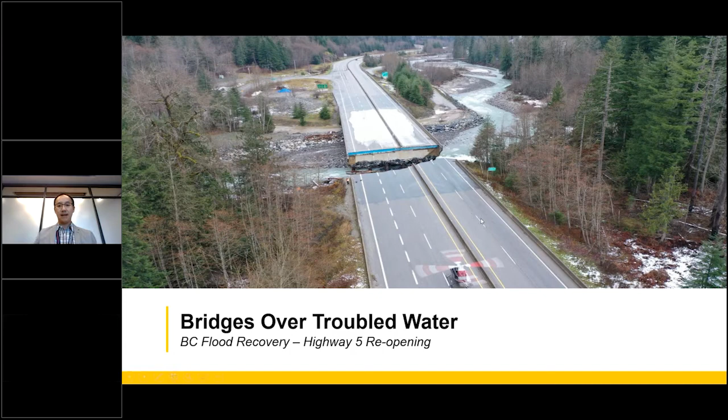So just a little bit of a quick introduction, so kind of who we are. We're one of North America's largest engineering and construction organizations. Our home base was started in 1884 in Omaha, Nebraska. Here is just a little bit of a quick overview in terms of the markets that we serve.

But more importantly, a lot of the question may be, how did we do it so quickly last year? So we are a little bit more than just a construction company. My group, the group that I belong to, is called KIE, internally known as Kiewit Infrastructure Engineering. Consider that as almost like an internal consulting firm within Kiewit itself.

We have our main offices in Denver, Laval, Burnaby, and now in Mexico. A lot of the engineering services that we offer from this office and from our other offices include structural, geotechnical, and civil, and on the civil side, it covers transportation, utility, drainage, and hydrotechnical. So it is with this type of caliber, this horsepower, that we were able to get the work done last year.

We actually had people flying in from Laval, from Denver. Everyone contributed. This goes beyond just the road builders and the engineering community in BC. We were able to get a lot of help. So hopefully today we'll be able to go through a little bit of a quick story about just how we got Highway 5 open.

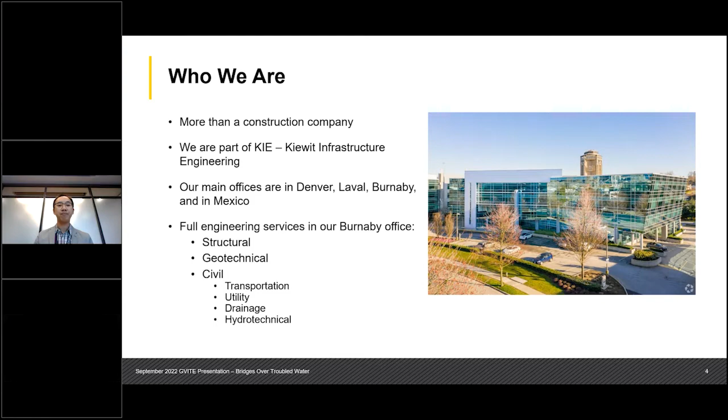So preface, a little bit of storytelling.

How we were out there is basically Kiewit is working on the Trans Mountain Spread 5B project. We are teamed up with a couple of other firms, so we call ourselves Team 5B. We were just working out there, like many of you on this call who are probably working on the Trans Mountain project as well.

Our spread runs from Coquihalla to the Hope region, and Coquihalla is just right about the Zopkios rest area, all the way south to close to Popkum in Chilliwack. Basically, we're working along, producing our traffic control plan drawings, similar to something you see here, our typical access point on Highway 5. That was our main job out there on Highway 5, before November 13th and 14th.

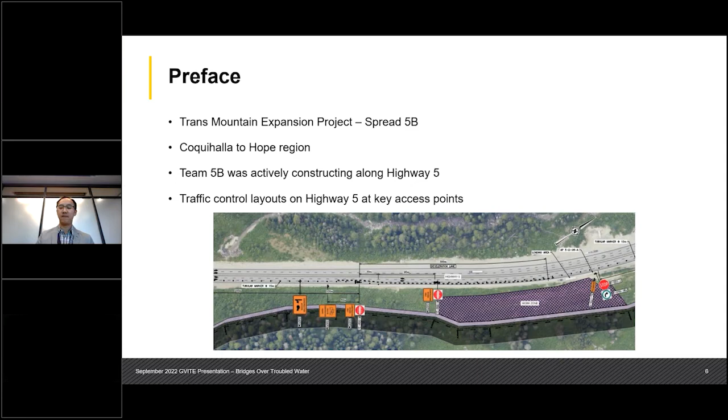And then that weekend, November 13th, everything changed. On November 12th, after we'd already had a pretty rough year from a weather event perspective, we had probably one of the hottest summers we've ever experienced with the heat dome. We had a lot of wildfires, and when fall came, it was a pretty wet one.

So we were pretty used to it, and then we started hearing about all these new terms, atmospheric river. No one really knew what it was. As far as I know, I only knew of the Pineapple Express. So, let's see what this brings us.

With the weather forecast, we thought, we're pretty used to the rain in Vancouver, so it could be just another typical day.

And then the next day, over the weekend, we started waking up to hearing all this news about the massive flooding we had, throughout pretty much all of the south coast of BC. Abbotsford, as you can see on the right side of the screen, completely underwater. Highway 1 was basically inoperable. You hear a lot about the mudslides around Highway 7 in Agassiz, and of course, our project, Highway 5.

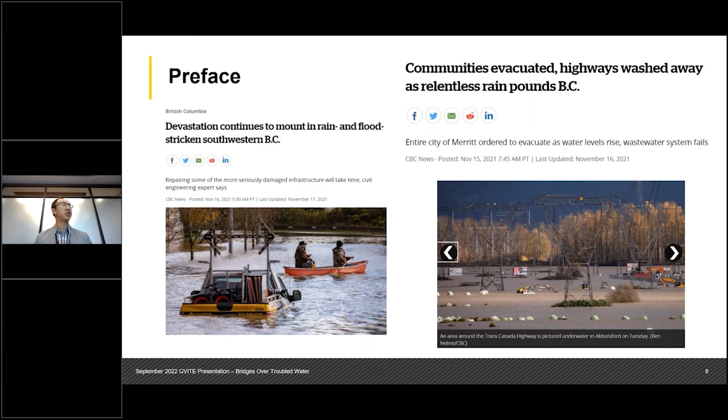I think most of you have probably seen these photos that were covered quite extensively by the media. Immediately on Twitter, the morning we woke up, we saw that this location, I believe this is at Carolin Mine, was completely gone. So Highway 5 is no more. It's no longer really accessible.

And then, as you can see in the title, not just Highway 5, we also got the Malahat Highway on Vancouver Island impacted.

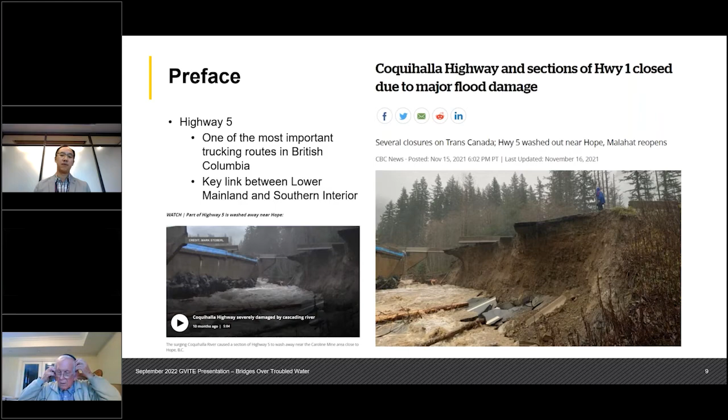Highway 5 probably needs no further introduction. It's one of the most important truck routes in BC, linking Kamloops and the Lower Mainland. The amount of truck traffic on there, for all of you who have driven on it, is pretty insane. In the summertime, you also get RVs and things like that. But in a year already devastated by supply chain issues with COVID-19, losing the linkage of Highway 5 was a big blow for our province.

And I don't know how... okay, give me one second, small technical difficulty. Not sure how it got all the way to the end. Okay, almost there. Okay, very sorry about that.

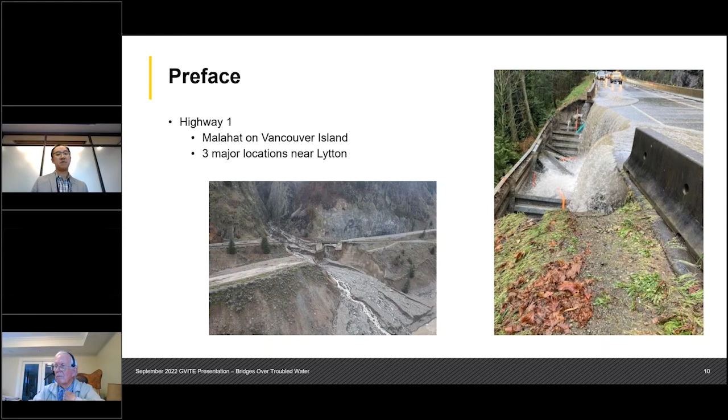So as mentioned, Highway 1, a couple of shots in terms of the damage we saw on the news channel. We got Tank Hill on the left side, where you can see the road was just completely gone. On the right side of the screen, that's Malahat. Highway 7 near Agassiz, massive washout over there as well.

So what that led us to was basically our land access between BC's South Coast and the rest of Canada was literally completely cut off. What you also saw, Highway 99 was also damaged.

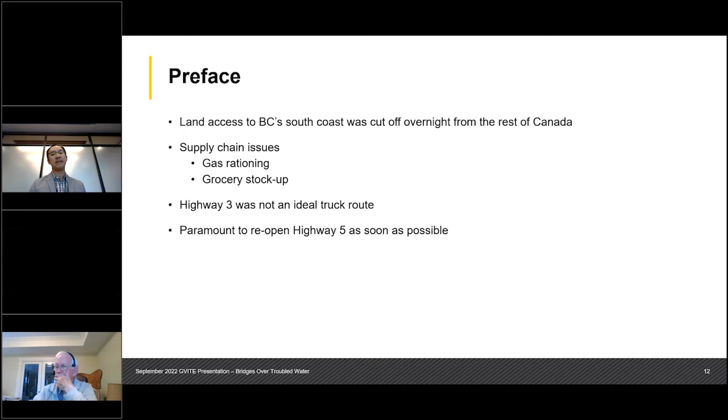It led to, hopefully, something that will only happen once in a lifetime, gas rationing. And we noticed a lot of people stocking up at the grocery store, worried about not having enough food and regular day-to-day supplies at home, just due to the fact that we'd no longer be able to get goods from the interior and other parts of Canada.

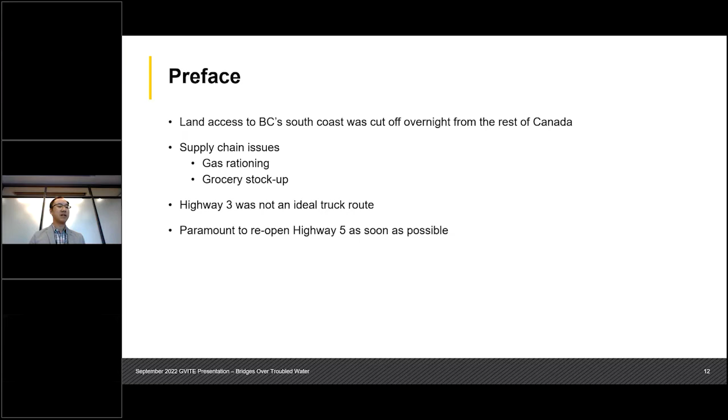As most of us have observed, Highway 3 is definitely not the ideal truck route. Trucks can travel on it, but it's definitely not able to take the level of volume that Highway 5 used to carry. So therefore, it is paramount that we work together as a community to try to open up Highway 5 as soon as possible.

So this is kind of where the story starts. I call it the Highway 5 story. The first thing we have to do is go out and take a look in terms of what the damages are. What we see on the TV screen is just a small snippet. You almost need to go out there and see it for yourself to have a good appreciation of what Mother Nature brought to us. So we were, a couple of slides, I call it the force of nature.

So November 13th, if most of you recall, it wasn't just one event. We were out there immediately afterwards, starting to help with early repair work, putting out riprap and things like that. But a lot of our effort was basically lost when the second atmospheric river came on November 20th, if I got the dates correct. We were out there again trying to fix things. And one more time, the third time, November 29th, and that was probably the most devastating blow to Highway 5.

Luckily, after that, things started to clear up a little bit, and that's when we could really get to work.

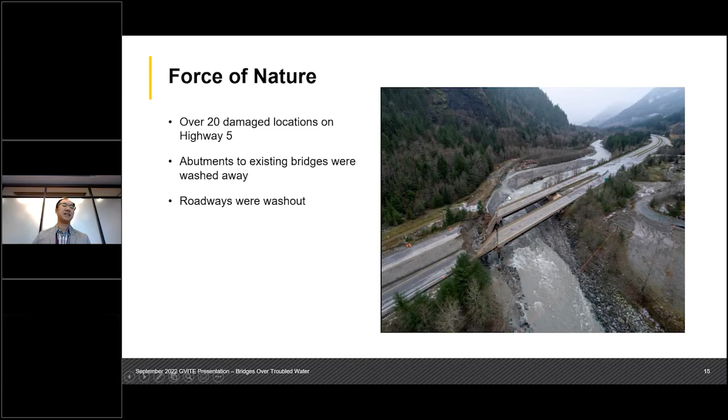A quick assessment on Highway 5 found over 20 damaged locations along the route. It ranges from abutments being washed away to roadway being washed out. What you see here, I believe that's Jessica Bridge. The water starts carving itself into many ways, and our abutment was completely washed away on this side, so the water ended up where it's not really supposed to be.

So starting from south to north: Jessica Bridge, and then next up we have Carolin Mine Bridge. Ottomite was assessed, but later it was deemed not to be an extensive project, so just patch repairs, if I recall correctly.

And then further up north is still kind of what you see today, the bridges just standing out there on their own with no linkage: Juliet and Bottletop. So here's a quick overview of what the damages were at these locations.

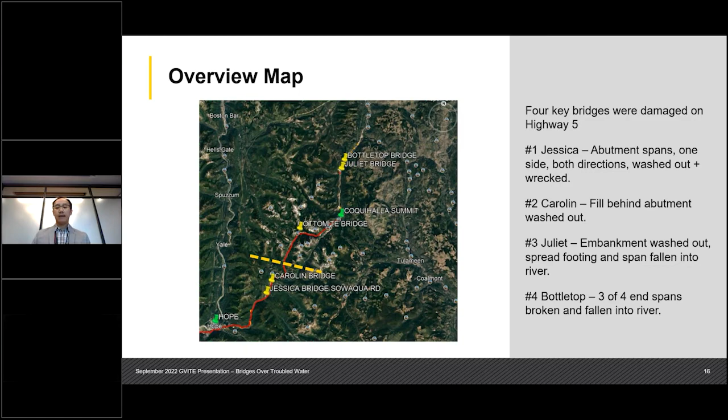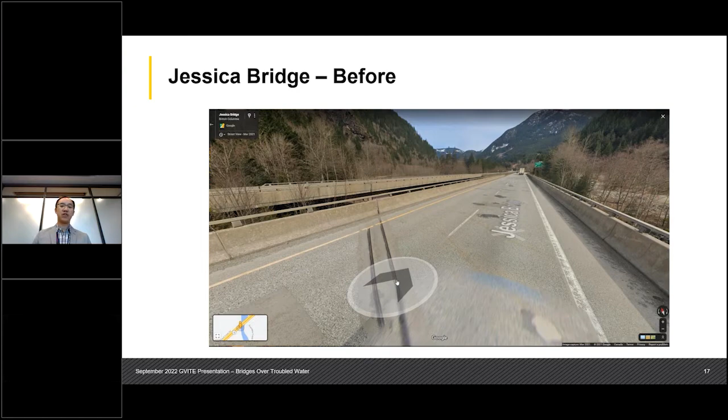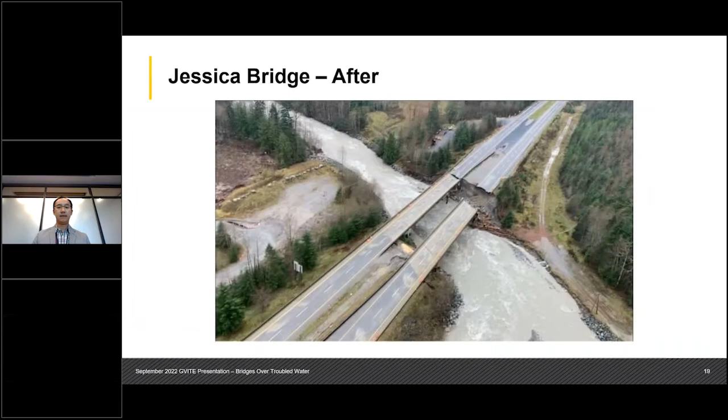This presentation focused on basically 3 bridges that we worked extensively on last year. Jessica Bridge, here's a shot of it before, and that's what it looks like immediately after. I think this one was taken after the first event. Here's an aerial shot of it.

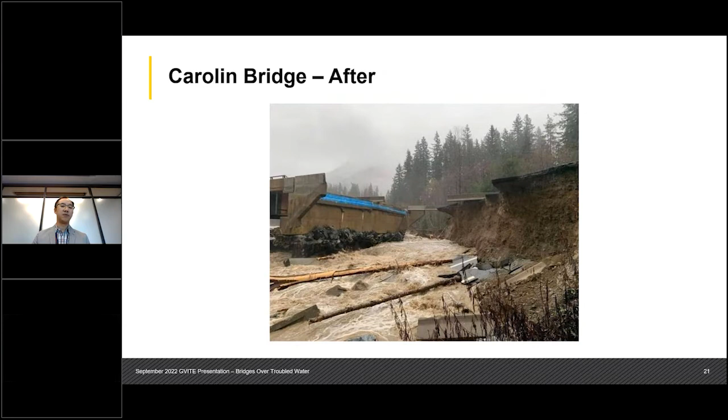Next up, we have Carolin Bridge. This is a shot before, and the shot after, basically what was covered by the news media.

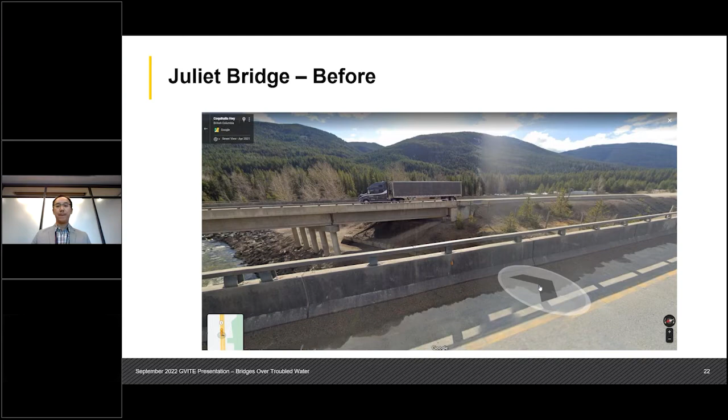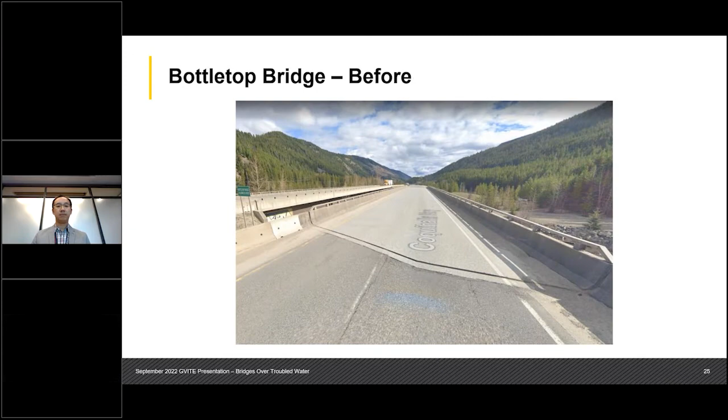Last but not least, we also have Bottletop. And Bottletop, as you can see, is just devastating in terms of what the force of nature has done. This riverway wasn't really supposed to be there. It's able to carve out the entire chunk of the highway. Basically, this is something we realized - a lot of the river training over time probably just wasn't able to withstand the amount of rainstorm that we encountered last year.

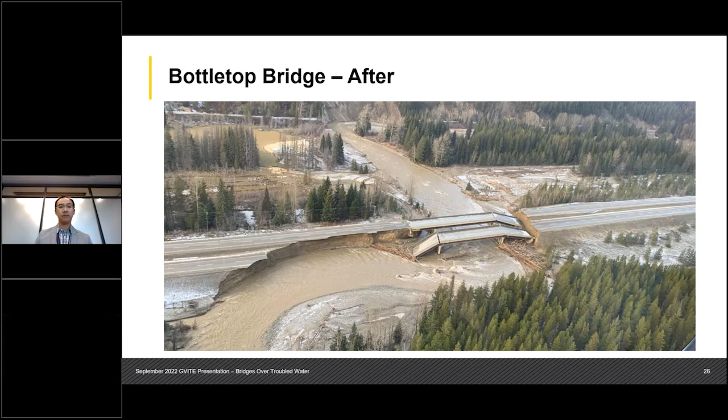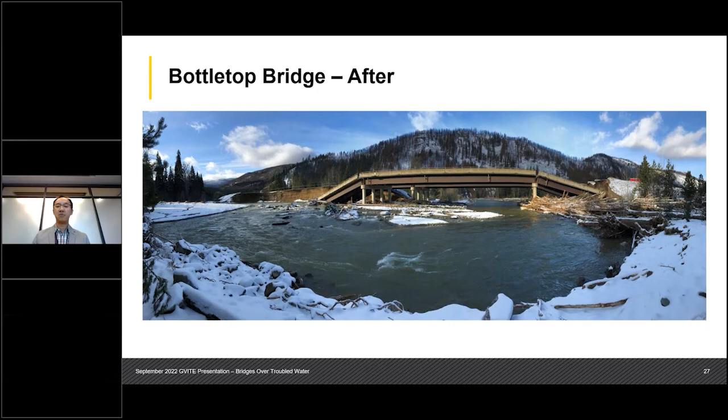As you will notice in quite a lot of the photos coming up, this also happened in the midst of winter up in this area. So a lot of the challenges we face include the climate we have to work in as well. Here's one of the shots taken a little bit after, immediately after the rain event. A few days later, we got a big dump of snow up there.

To do the damage assessment, we have to do a very good job of data gathering. With Highway 5 being inoperable, we have to come up with different ways to do it. One of the most effective ways to conduct data gathering is having in-person visits using helicopter. It allows us to see the damages of Highway 5 from the air, but at the same time it's also able to land our field team in places that vehicles cannot get us to.

Another item that we used quite extensively last year to help assess the damages, and I believe the ministry and a lot of the other firms involved with the flood recovery also used drones. It's been a pretty cool piece of equipment for recreational users, but for construction, it's actually very important these days. It lets you do a site visit while staying on safe ground, so you can go up, and at the same time go down underneath bridges to assess the embankment and the integrity of things like that. So the usage of drones was actually quite instrumental on this project.

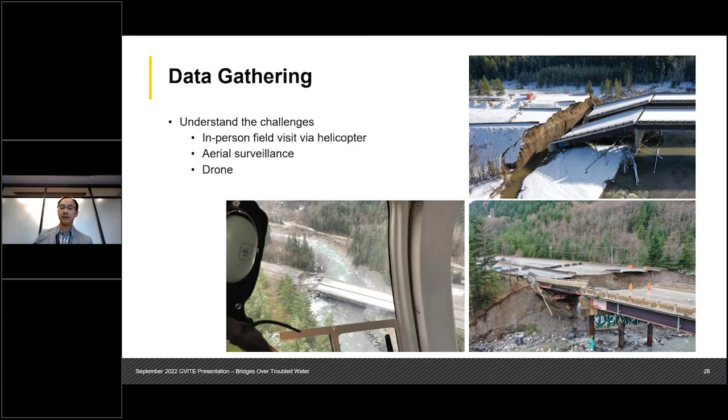This happened to be a pretty common sight. I think this was December 6th, if I'm not mistaken. So after the third atmospheric river event, we were able to get some calm skies, as you can see here, so we could do a more comprehensive site visit and assess the damage in a bit more detail. A lot of the repair work was already underway by this point, but we needed to figure out exactly what we were going to do to try to open up the highway.

So when the land highway is closed, basically what you end up with, this is just at the top around Bottletop, you basically have a highway in the air. It basically became an impromptu helicopter landing pad, and the amount of helicopters going in and out of there was tremendous. This was also my first time getting a ride on a chopper, so we got to ride on a pretty cool red one with a bit of a bubble screen.

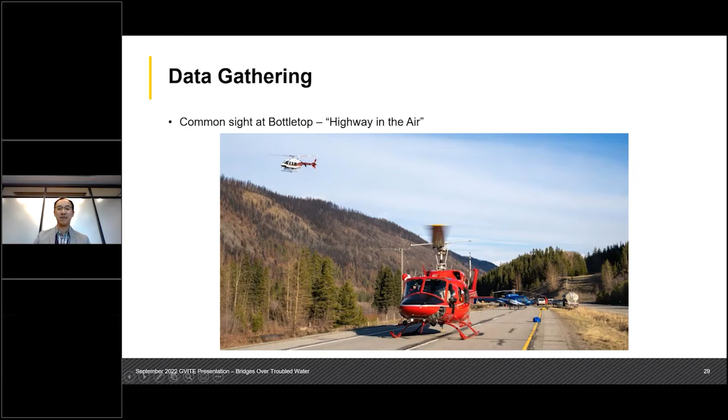So after assessing all the damages, it's time to get to work.

The importance of Kiewit on this project was that we just happened to be at the right place at the right time. The amount of equipment and manpower required to start the repair work requires a lot of resources, and we happened to be right next to the project, building our Spread 5B, which was put on hold by that point. So we were immediately tapped on the shoulder by a lot of our partners in the area, asking if we were ready to help out. Of course we were. We rolled up our sleeves, moved our equipment, and were able to mobilize very quickly.

So the two groups we worked mainly with out there were Emil Anderson, who is the highway maintenance contractor south of Portia, and also YRB, who look after Highway 5 north of Portia. These are the two groups we worked very closely with, and essentially that's how the project broke up. So Jessica and Carolin Mines were within the Emil Anderson side, and Juliet and Bottletop were with the YRB side.

The first thing we had to do was remove a lot of the damaged bridge sections out there. As we were doing that, we were able to look at the damages a little more closely, ensuring that the substructure wasn't damaged. Most of the impacts we noticed were really just on the abutment side, luckily. The piers for the bridges tended to be in decent shape. So we were able to start looking at what some of the more effective and efficient solutions were to start restoring highway traffic.

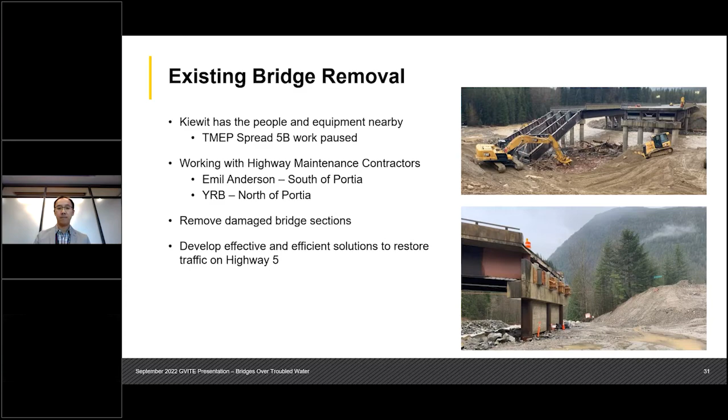While we were taking down all the damaged infrastructure, it was equally important to protect the existing infrastructure as well, to make sure we didn't lose any more bridges. This was essentially what we talked about when we landed our helicopter: let's go out there, take a look, let's make sure Highway 5 isn't compromised anymore.

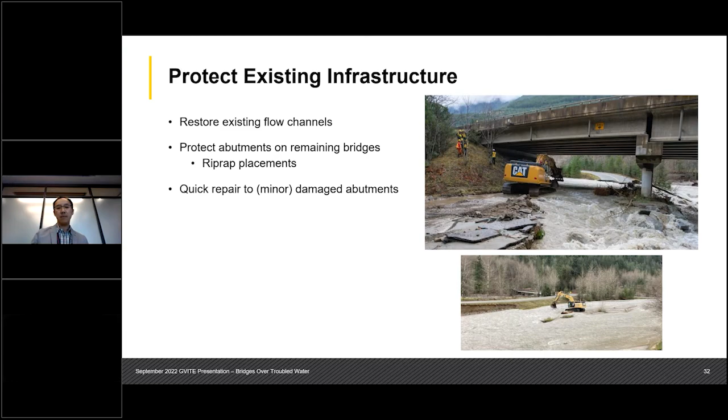The original thought was we'll probably be opening traffic in 2022, in January. It started off being an estimate of end of January.

So we need to ask ourselves the question at that time: what is the realistic opening day? What is the realistic opening configuration? Would it be a 2-lane highway, 4-lane highway? Where are the damages? Do we need crossovers? What are the detours needed? Where are locations washed out? Do we need lane closures?

Once we have an idea of all those things, the most important question becomes: where do we start throwing our resources to start repairing the highway? What are some of the more critical components, and what are some of the components that we can come back to afterwards?

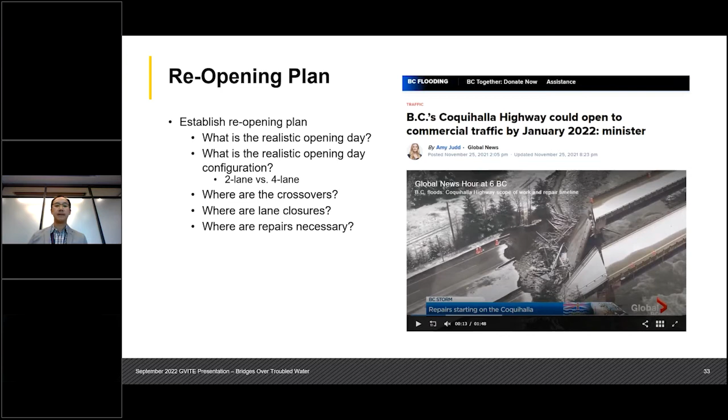So what we identified are some of the key sections that we need to start getting to work right away. It was essentially a race against time. There was the Othello section, AKA Peers Creek in this area. There's Jessica Bridge and Juliet Bridge, as well as Bottletop Bridge.

Othello washout was pretty extensive. I don't know if I have a photo in this slide, but essentially that section, even to this day, is still closed. The latest intel I heard is they have already awarded it, and it should be opening in due time. Hopefully that's when we can get more of the 4 lanes back on Highway 5.

This schematic allows us to visualize where the different crossover needs are, so we can do a little bit of field intel to see what are suitable locations. Because one thing that we didn't have at that time was time.

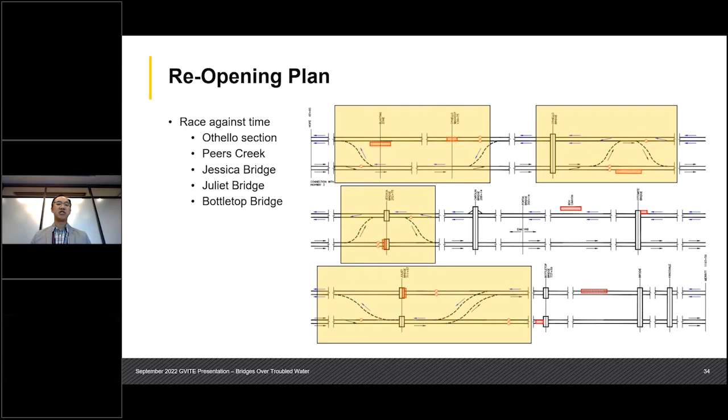So we have to basically find locations that we can implement these detours very quickly. What we try to minimize is finding a flat spot where you already have an existing relatively flat median that we can really quickly put a median crossover in. We have locations where we may be able to skinny up the lanes a little bit if possible to try to get more lanes through. And that was the idea of the schematic, to demonstrate what we need to do to get to work.

At the same time, one of my main roles was to develop a traffic management plan in anticipation of the opening. So while construction is underway, while we're trying to figure out what kind of detours or crossovers are needed, we need the plan to start setting up the framework. When Highway 5 does open, how is it going to operate, and how can we make sure it operates as effectively and as reliably as possible, because by that point there's a lot less resilience in our highway network.

Any major closures to the reopened Highway 5 would still be devastating to our supply chain. So we started drilling into more detail as part of this traffic management plan, designing the detours, we need to come up with a reliable design speed for them. We need to figure out who are the users of the highway, who will be responsible for maintenance, and what are some of the criteria for incident response.

For those of you who work on the TMP quite often, this is essentially the framework that tends to be set up within the traffic management manual. That's essentially the Bible we are sticking with.

And we're looking for early wins. Again, going back to what can we do as quickly as possible to get our temporary detours in place, and then also get the supporting signage out there.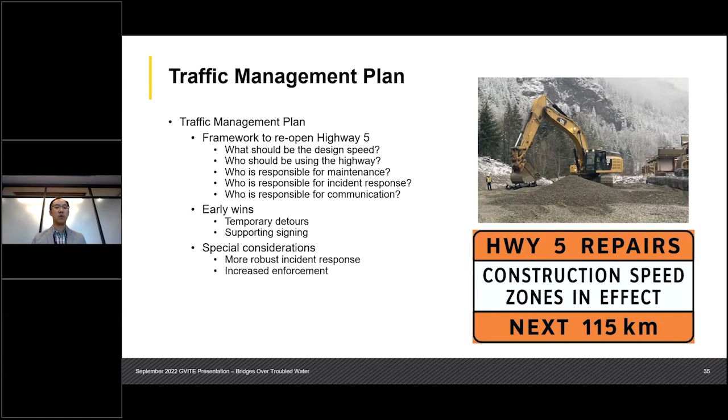Essentially what we've established is, by that point, as someone with experience preparing TMPs, a lot of this will have to be a judgment call. Understanding the amount of damage on the highway, what is the likelihood that Highway 5 will continue to be posted at 120K. We made a conscious decision that maybe we should target more of a 100K posted speed in areas not damaged by the flood.

And at the locations where we are going to put in our detours, the idea is we will try to go with more of a 50K design speed. We weren't able to build very luxurious crossover designs given the challenges out there, so we settled on 50K as a reasonable speed for the detours.

The detours ended up being at Othello Road, Juliet, and Bottletop. These are some of the detours you still see out there if you've driven through Highway 5 recently. Other considerations, particularly for Juliet and Bottletop, by that point we realized it's just not reasonable to try to get it open to the 4-lane state.

But at the same time, what you see here is Jessica. And at Jessica we started getting really good traction, a lot of good momentum. You can see on this photo that we got some temporary MSE walls in, and we were able to get some temporary approach slabs. At Jessica we were very lucky that we determined early on there's a very high likelihood we can get it open to 4 lanes.

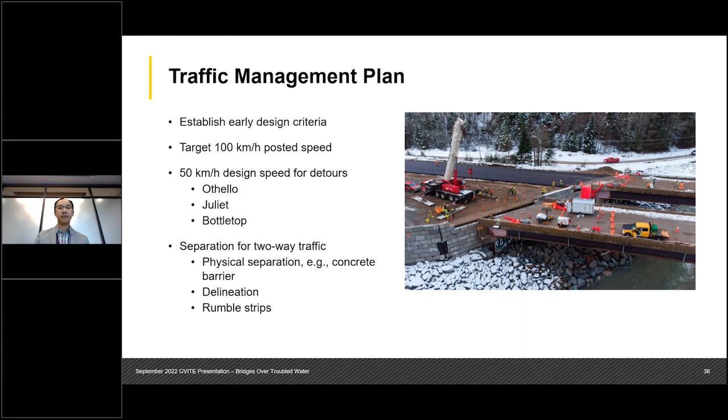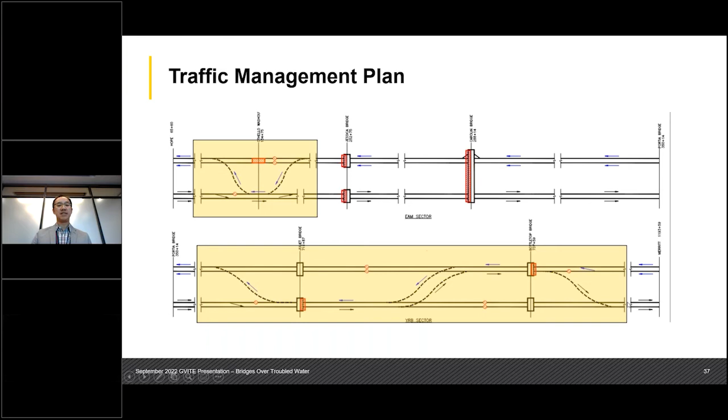Perfect, thank you. So bang on at slide 37. We're able to reduce our scope quite substantially to focus on just these two main areas. I'd consider that at that point a pretty big win already.

So we're able to refine our traffic management plan and start putting more details on the design to feed it into the construction crew out there so they can get the detour design going.

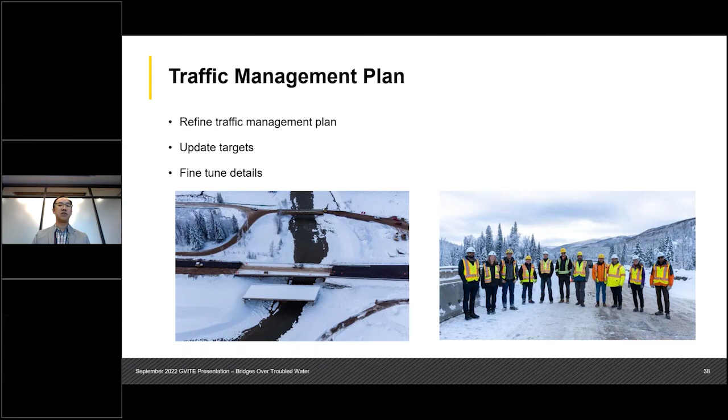I believe this is just two weeks after the last atmospheric event, so probably December 12th or 14th. This is really the first day you can actually drive from Hope all the way up to Bottletop - all the land access was restored in a very temporary manner. We had our first meeting on site with the ministry, not necessarily having to fly in by helicopter. At this meeting we were able to fine tune some of the targets and details to make sure we could open up this highway safely.

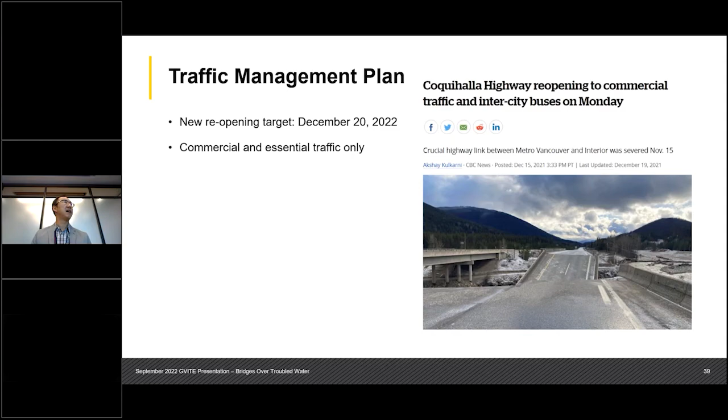And then the new target came up. Now that we were able to drive up there, we're able to accelerate the schedule of the reopening. Rather than end of January, it got moved to early January, and the target opening day became December 20th. The conscious decision was made to open up to commercial and essential traffic only, so we can test the water and see how it operates, and if it works well, try to open up to a little bit more.

As a result of everyone's hard work, this is really the feel-good story afterwards - the fact that we're able to get the job done. On December 20th, myself, Victor, who is also in this room, and our director drove up to site and parked at Jessica to watch the first southbound truck make it through from Bottletop down to this area. The moment that truck went through, horns blaring and things like that - it's a really good pat on the back to make sure that not just ourselves, but the road builders, the ministry, and everyone else who contributed had done an incredible job getting Highway 5 reopened.

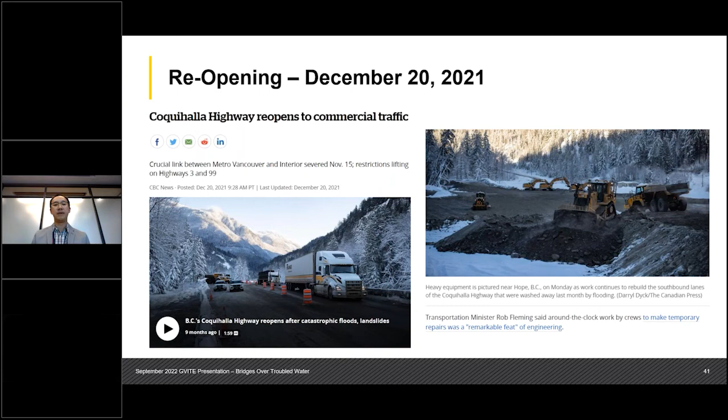As a result of that, here's some photo shots, aerial shots courtesy of Victor. So this is what you see - it's a four-lane down to two-lane segment up at Juliet to Bottletop. You can see that some of the bridges are still kind of stranded there, and we have two-way traffic basically running on the remaining bridge.

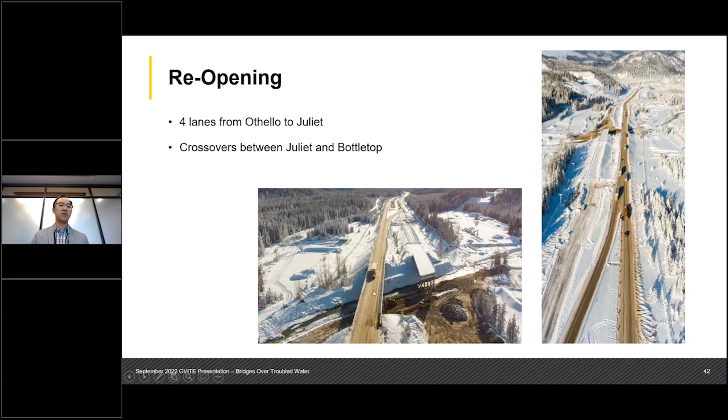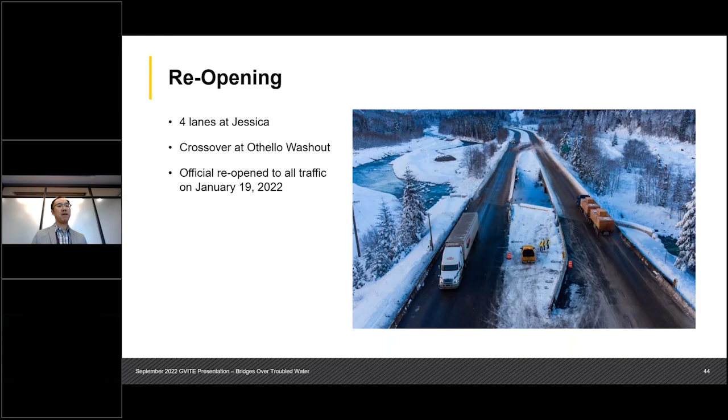Here's the shot at Bottletop, and just in time for the winter weather - I know we try not to do it, but a lot of the paving work was definitely done when the weather was not ideal. This is us sitting in the median at Jessica, trying to witness the four lanes being opened at that location. The ministry monitored the traffic performance very closely, and overall there were no major concerns. So on January 19th, a news report came out basically saying that Highway 5 has then reopened to all traffic.

Some of the lessons learned: always plan for the worst and hope for the best - that was kind of like my motto. Planning for the worst, we did a lot of the TCP drawings and a lot of the detours that ended up not being needed, and in a way that's a good thing. Doing more is better than doing less, because if it's really needed, we will have to scramble. We're happy we were able to get a lot of the detours and the TCP done for all the locations we thought we may need it, and at the end of the day only needed it for about 3 to 4 locations.

Establish and maintain effective communication was very important - this is through people in the field, and also with our executive, and also with the ministry, with the highway maintenance contractor, to make sure that we are fully aware in terms of what everyone is doing, where to mobilize our resources accordingly, and coming up with good direct lines to who the decision makers are.

Data collection - we spoke about the importance of taking advantage of drone observations from field personnel during daily meetings. That was very important. And one unsung hero is definitely Steve Rose here. He lives out at the Sowaqua Creek area, and he was posting basically daily video. A lot of us would watch his video every night before we go to sleep when he uploads them, to get a good view of what's going on out there. He's one of the very important individuals, and it's something unorthodox, but came in really handy for our work.

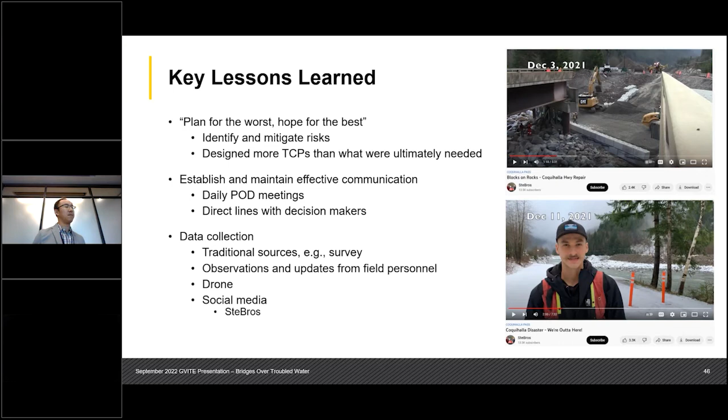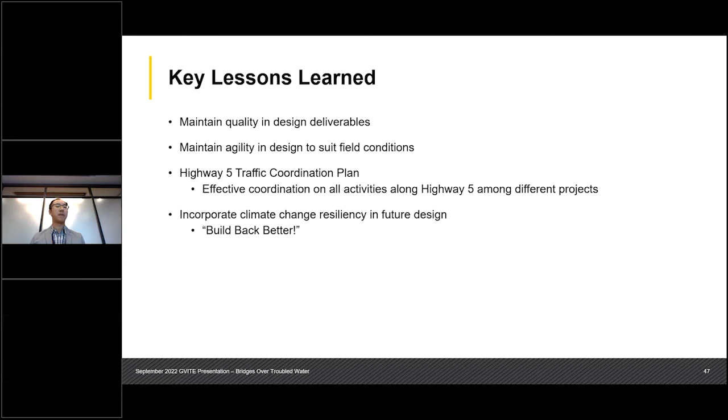With that said, appreciation goes out to everyone who has contributed, not just to Highway 5, but to Highway 1, Highway 3, Highway 99, Highway 8. Our community came together, the road builders came together, and there's no me, no you - everyone had to get this done. So I just wanted to say thank you to everyone who has contributed.

And here we are. Questions?